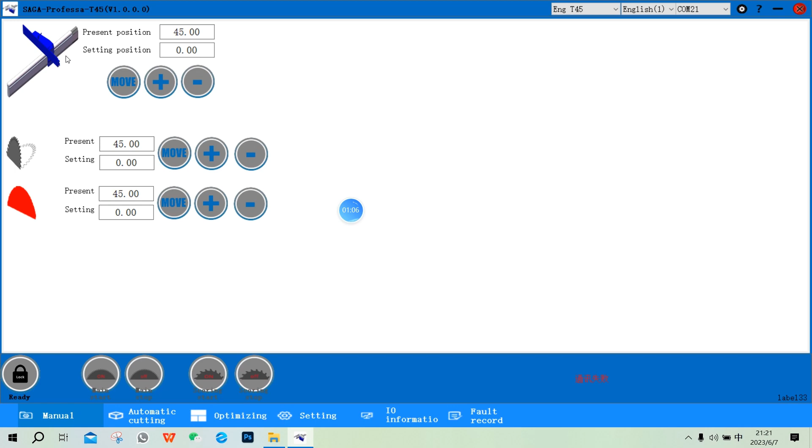Here we got two different models. One is Eng T45, another one is Professa T45.

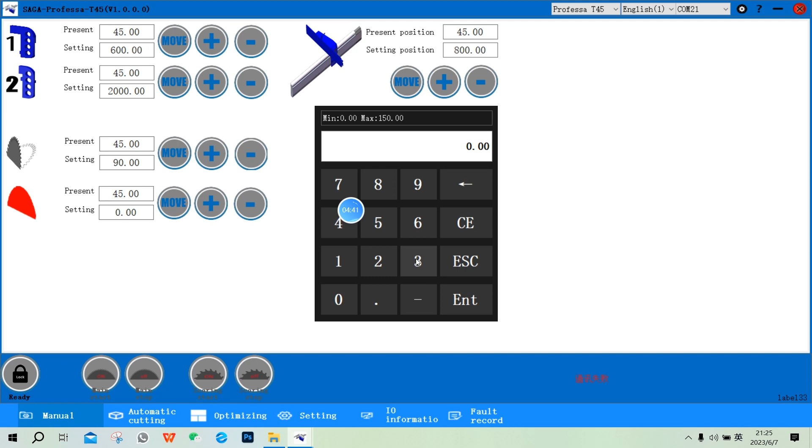Okay, this is the height of the blade. For example, if we want to cut 30 millimeters, then we may set 50 and press move. This machine has very precise blade raise and lower, so we can also use it for grooving work.

Okay, to the bottom you can see this is the main blade start and stop, and the scoring blade start and stop, but when we press it, it can't function because there is a lock here. This is to make sure that all is safety.

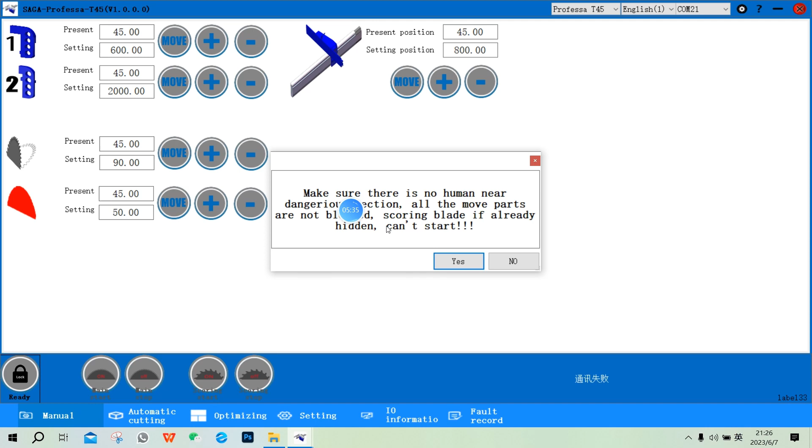If we press ready, it gives a signal that checks if there are any humans near the dangerous section, whether all the paths are not blocked, and whether the scoring blade is hidden, so it gives us a note. If we make sure there's no problem, then we press yes, and then it is ready. Then we can start the main saw and start the scoring saw.

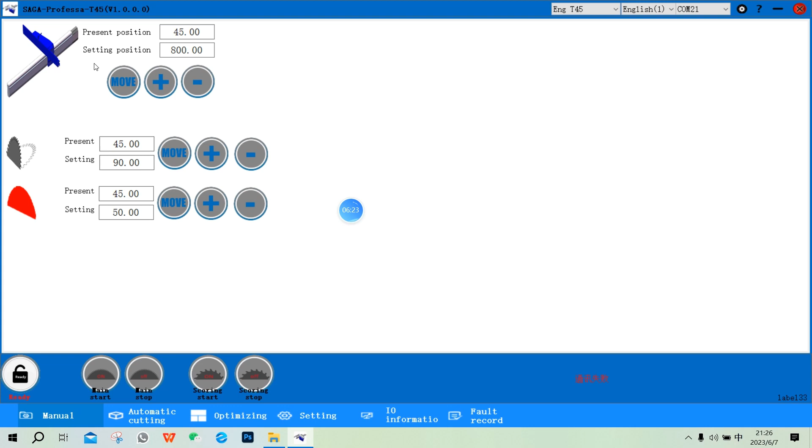Okay, this is the manual interface, and the difference with the Professa T45 is only this function, the electrical movement of the cross-cutting fence. If we press T45, then the cross-cutting fence disappears and only the rip cutting fence is left, but the setting is the same.

Okay, we come back to Professa T45 and we see automatic cutting. This interface is shown to us. This is a 3D simulation of the SAGA T45 saw, and here we can open any files already created by other software.

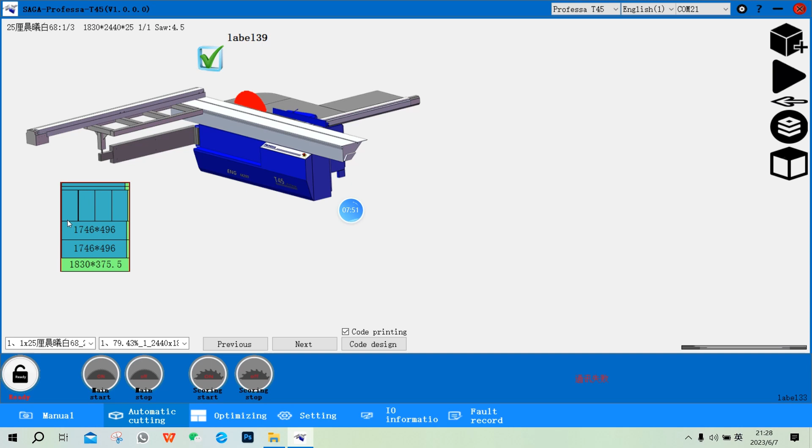You see, if we open it, it has the numbers, and this color is the useful material, and this color is the left material.

Okay, the second button is for play. If we want to cut, then we press play. Your panel will be shown on the saw, and it will instruct us for the cut.

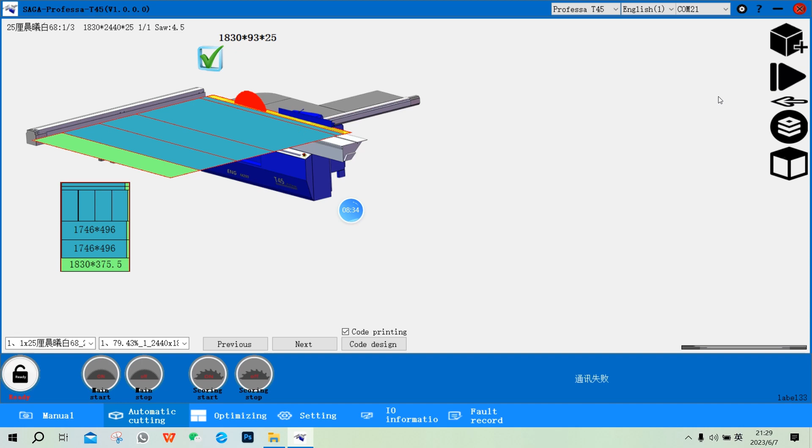For example, we press it, it makes the first cut, then the second, the third, the fourth, the fifth, and the light green color is the material we left.

You can also choose the code printing function, which uses a printer on the machine. This is an optional fitting for the machine. Each cutting can get a printed G code. If we select it, each time we cut, a G code will be printed out.

Okay, until we finish.

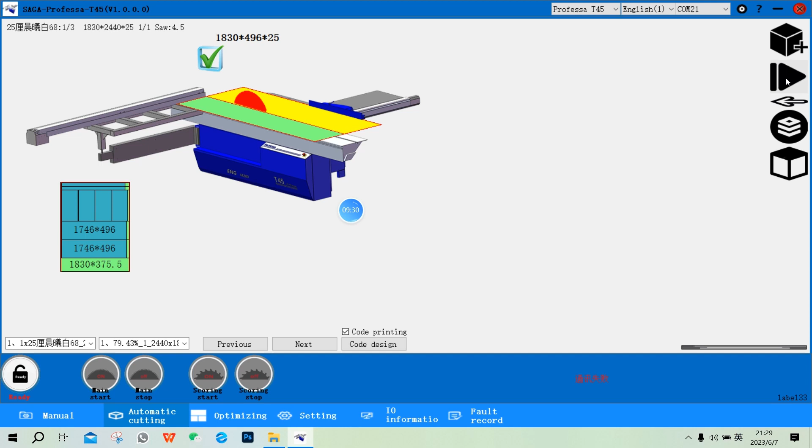Okay, once finished, there will be a mark showing that we already finished the cutting. We go to these icons, and here is a programming interface.

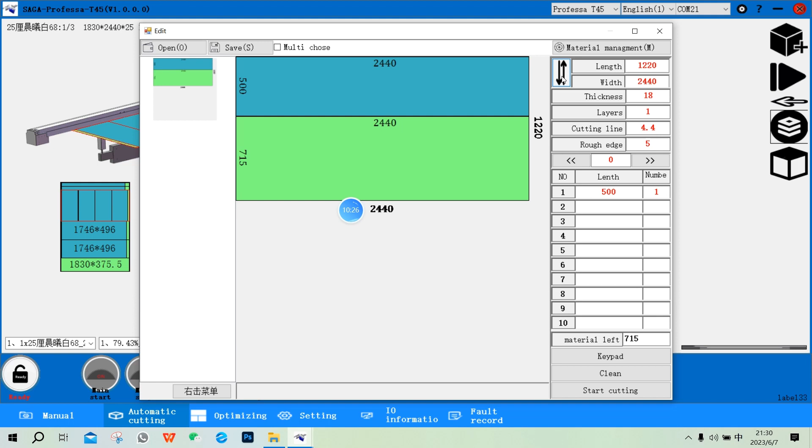Without optimized cutting software, we can still program the cutting on this. It's got built-in programming. You press here, and the panels will change directions.

And certainly you can type in the size of your panel to make sure the system knows the size of your panels, also the thickness, and how many layers you want to cut.

And also cutting lines. Cutting lines means the thickness of your blade. What is the cutting line becomes the wood dust.

And the rough edge means the trimming work before you cut. We want to trim the edge to make it clean, or make it precise 90 degrees before cutting, to give us a precise reference for cutting. So most of the time we do a trimming work.

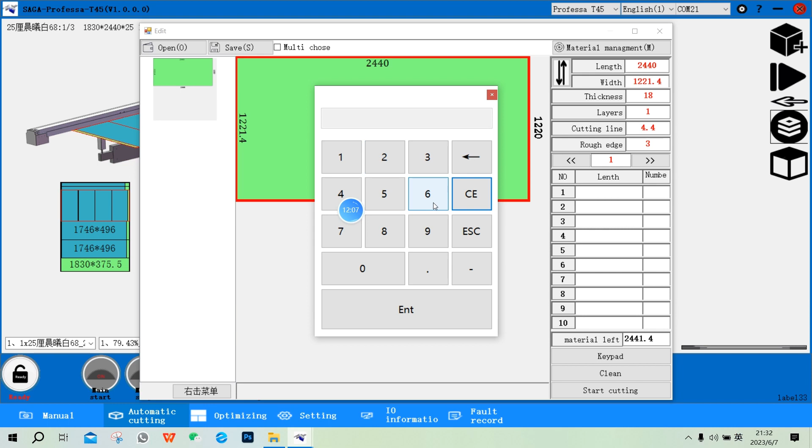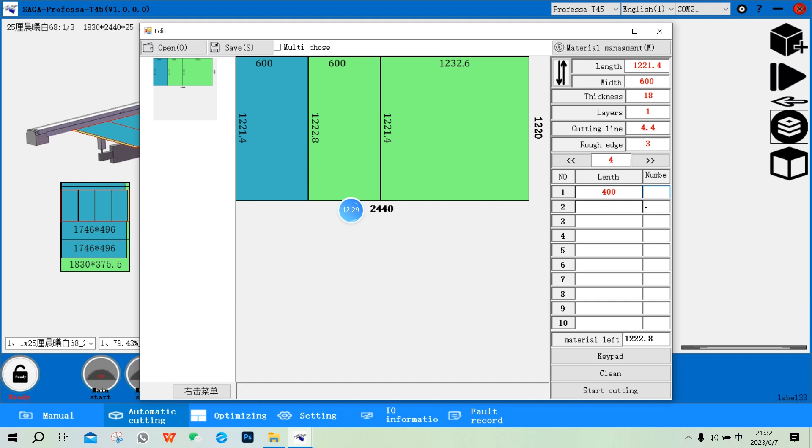Okay, we see here, if we want to cut, for example, 600, and 2 pieces, we enter, it cuts 2 pieces of 600. If you want to cut more of a certain piece, then we can type in like 400 and then enter, and then 1 piece.

Okay, this is what we are going to use. For example, you can also cut another 500, 1 piece. Then we get this piece, 500.

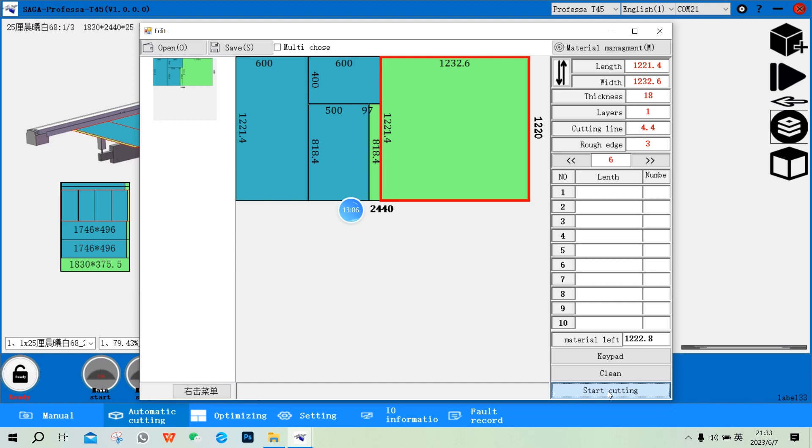Okay, after your programming, you can press start cutting here. Then we come to this interface again. If you want to cut, you press play. The panels will be shown on the 3D simulation interface, same as before, you can press play.

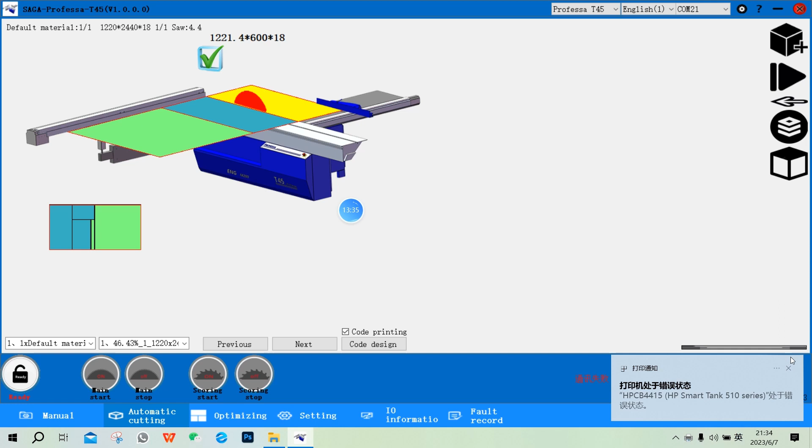And then you see this is a 500 length material we want to cut. Okay, we finished the cutting.

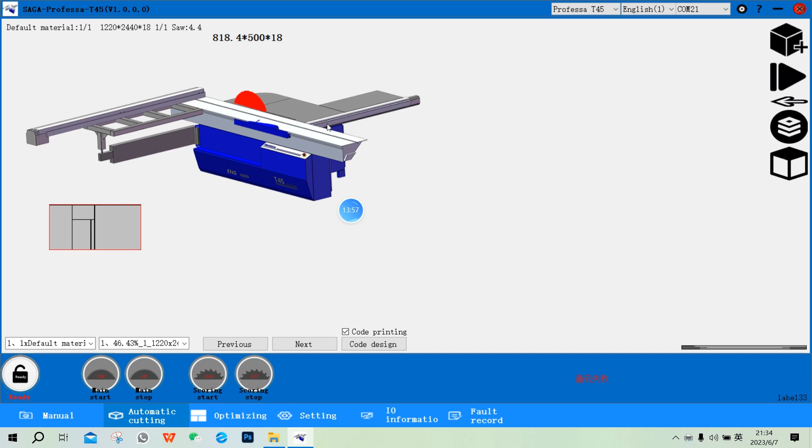Okay, here is a 2D simulation. You can choose 3D or 2D view, whichever you prefer.

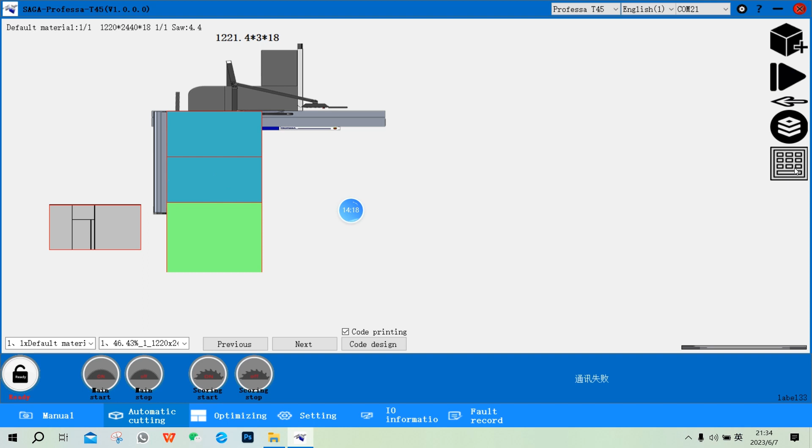Okay, for optimizing, we need to buy optimized cutting software which can program for us automatically according to the logic, to make sure we can get more layout and less material waste.

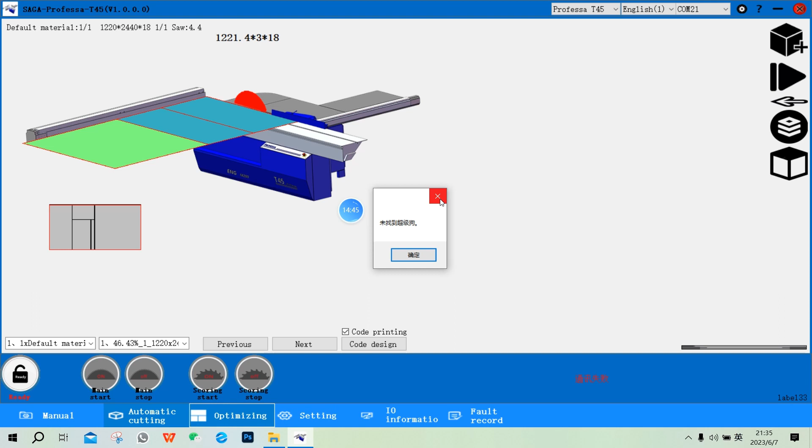Okay, on the settings here, all the parameters of the source. For example, you can see here is the setting of the present position. If there's some problem with the saw, you can reset the size by cutting one piece of panel and typing in the present measurements, also for the rip fence, and other information.

Also, the diameter of the blade. When we do groove cutting, or if we want to get precise numbers of how much the blade comes out of the table, it depends on the diameter of the blade, so the system should know the diameter of the blade.

And also we can set the speed of the servo movement, for manual and also automatic speed, and other information.

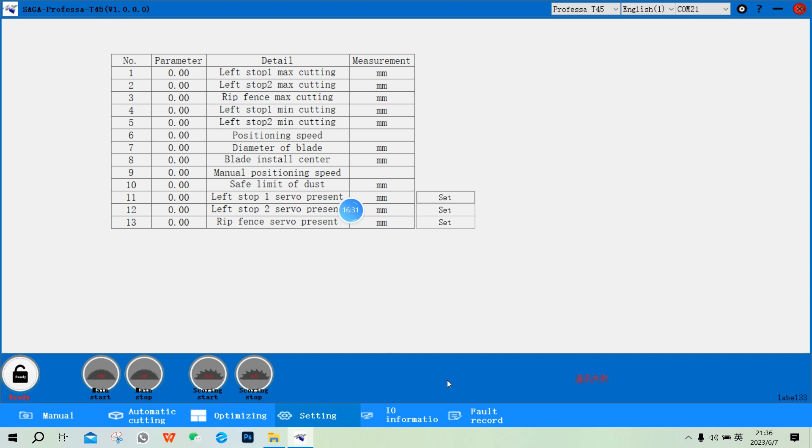Okay, here you've got the info for the system, and here we've got a fault record. If the machine has any problems, there will be a record of the fault, making it easy for us to communicate with the factory and to do maintenance on the machine.

And this working record, this record will record how much work we have already done.

Okay, this is our T45 sliding table saw control interface. You can see it's all very easy and very vivid to show you, and we try to make it very simple to use, even for new users, so that even new users can learn to control it well in less than 5 minutes.